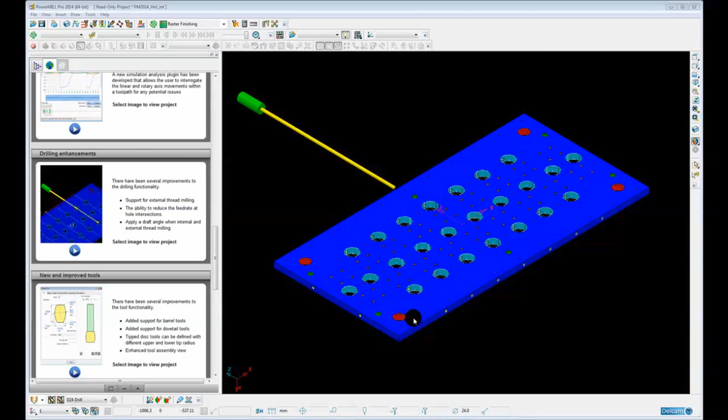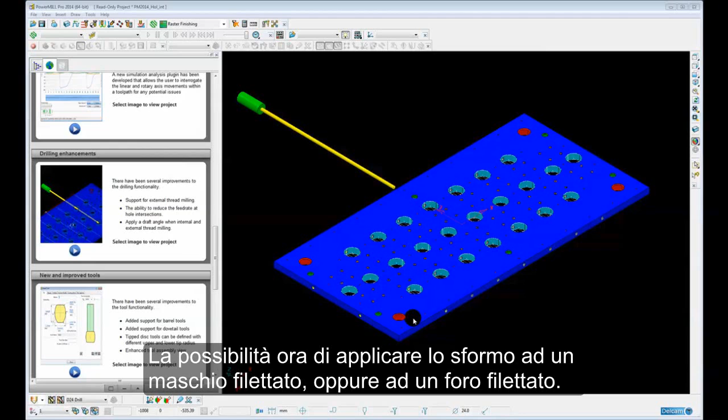There have been several enhancements to the drilling functionality in PowerMill 2014. Included in these enhancements are support for external thread milling using a thread milling tool, the ability now to apply draft to a threaded boss or a threaded hole, and finally the ability to reduce the feed rate when the drill breaks through an intersecting hole. This is particularly useful when gun drilling with small diameter, very long drills.

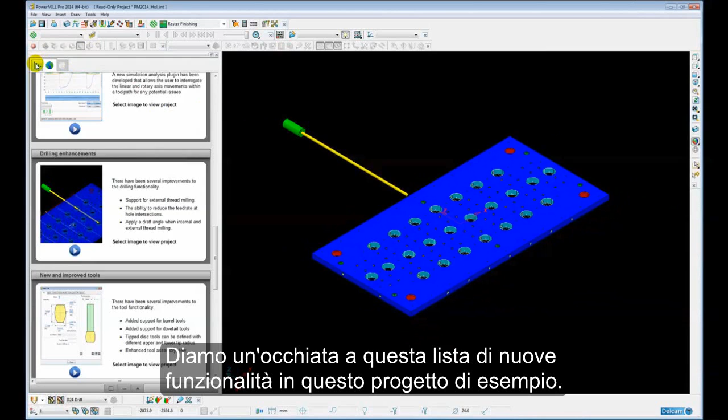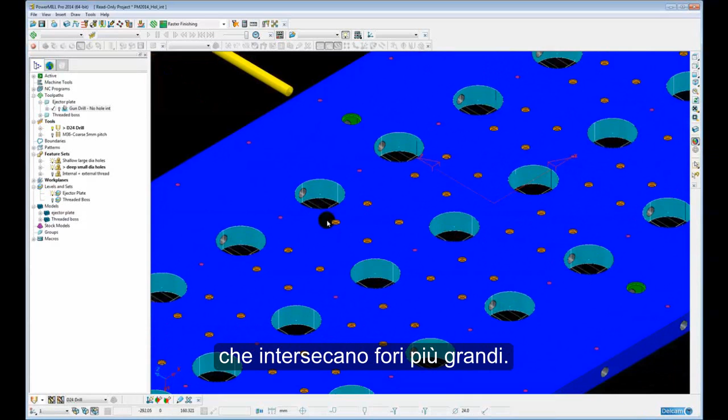Let's have a look at this list of new functionality in this example project. First of all, we're going to look at varying the feed rate at hole intersections. Here we have an example of a mold tool plate, an ejector plate, and we have a series of smaller holes that intersect larger holes. We've already created the hole features by simply recognizing the holes in the model.

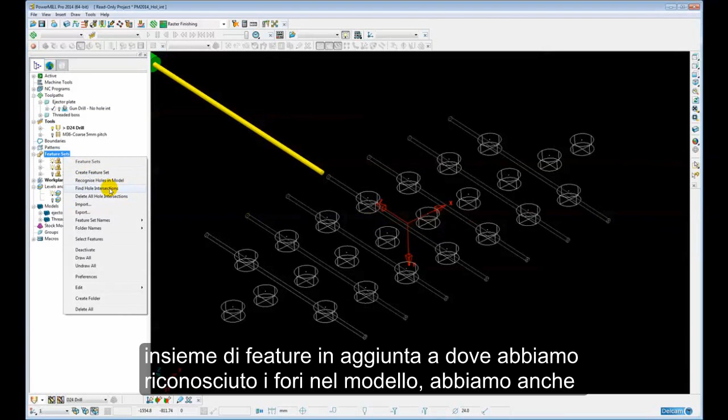Now, before we can apply the varying feed rate at the hole intersections, we need to find all intersections of all holes in PowerMill. This is a simple operation. We simply right click on the feature set. In addition to where we have recognize holes in model, we also have find hole intersections. So this will scan through all the holes and display and identify all the hole intersections. So here we can see the hole features are displayed with the hole intersections.

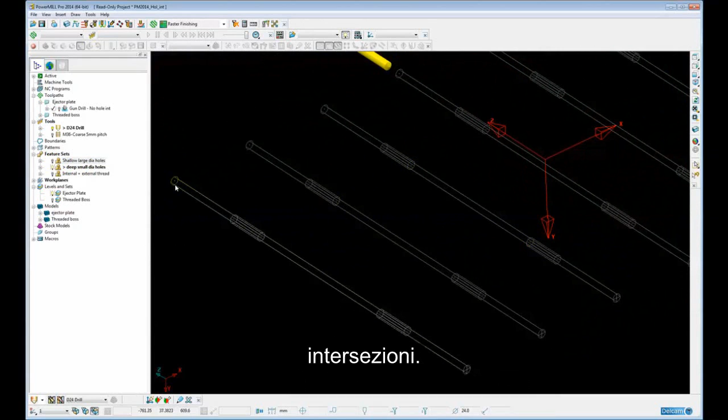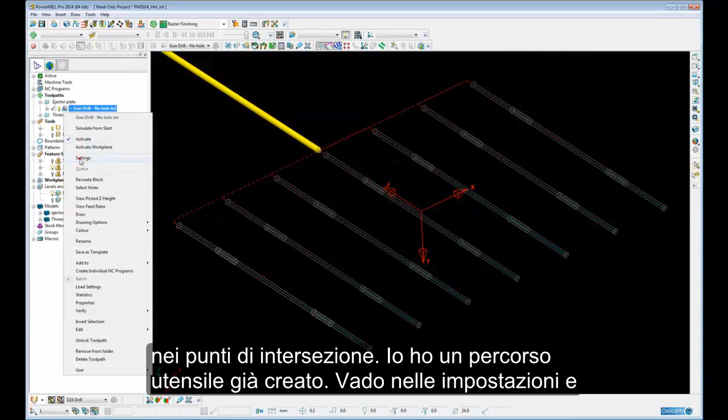Now it's simply a case of creating our drilling toolpath and activating the various feed rates at the intersection points. I have a toolpath already created. If I go to settings, simply clone that toolpath. So just to show you how we vary the hole feed rates, we're going to create a single peck, drill hole to depth.

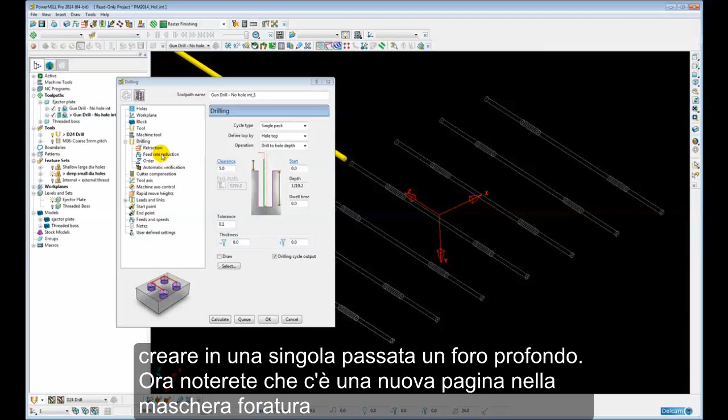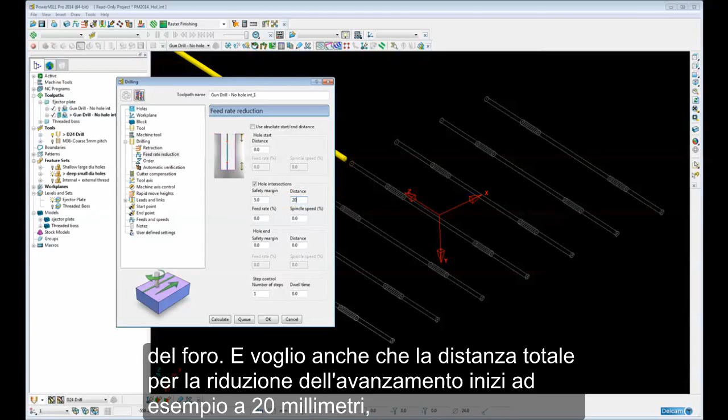You'll notice there's a new page on the drilling form called feed rate reduction. So we're going to reduce the feed rate at hole intersections. Now I want the feed rate to be fully reduced at least 5 millimeters before the actual intersection of the hole, and I want the overall distance for the feed rate reduction to start to be, say, 20 millimeters. So from 20 millimeters to 5 millimeters, that's when the feed rate will be reduced, and I want to do that in 4 steps.

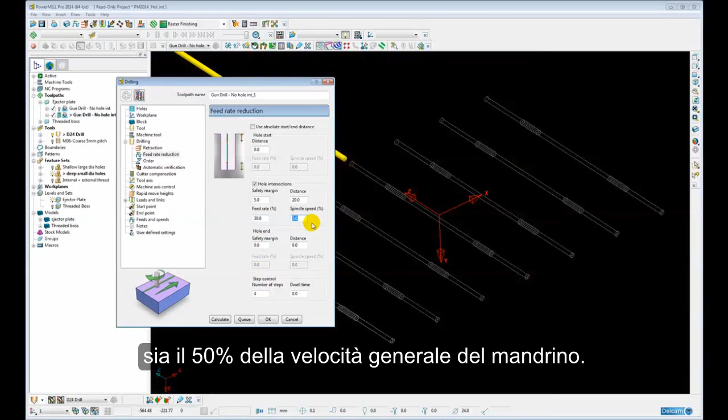And I want the final feed rate to be 30% of the general feed rate, and I want the spindle speed to be 50% of the general spindle speed. So if we go back to our drilling form and select all our holes, and then simply calculate the toolpath.

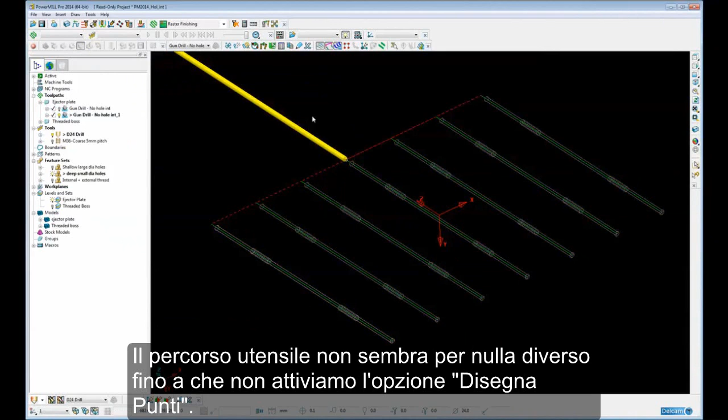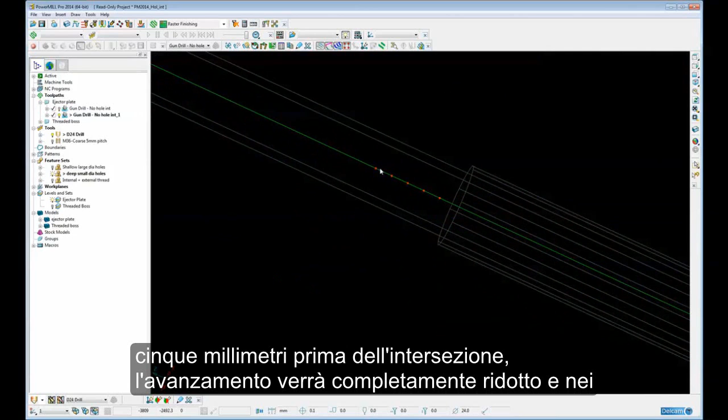So obviously the toolpath doesn't look any different until we switch on the draw points. And then if we zoom in, we can see it's added in extra points within the toolpath. So here we see at 5 millimeters before the intersection, the feed rate will be fully reduced, and an extra 20 millimeters on top of the 5 millimeters is when the feed rate will start to be reduced, and the feed rate has been reduced in 4 increments.

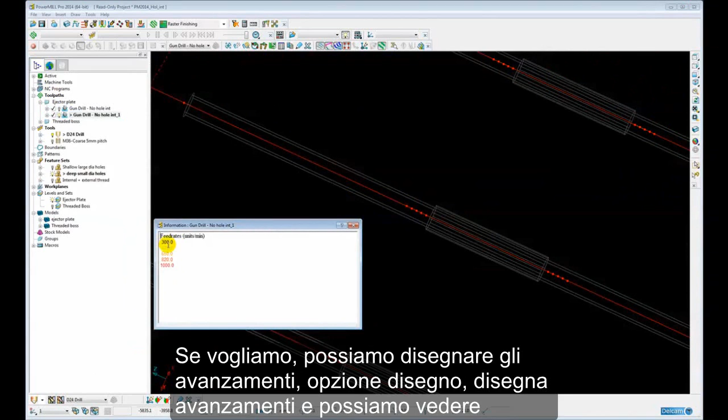If we want to, we can do draw feeds, drawing option, draw feeds, and then we can see the exact feed rates that are going to be used. So our general feed rate is 1000, and we drop down to 30%, which is 300.

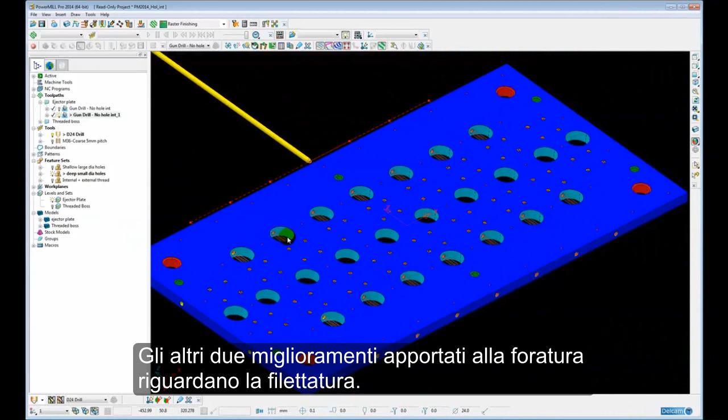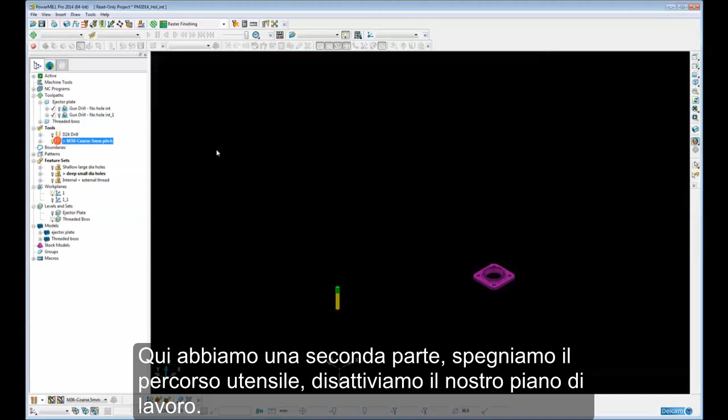The second and third new drilling enhancements involve thread milling. So here we have a second part. Just switch off the toolpath. Deactivate our work plane. So we have a simple plate with a threaded internal hole and an external boss.

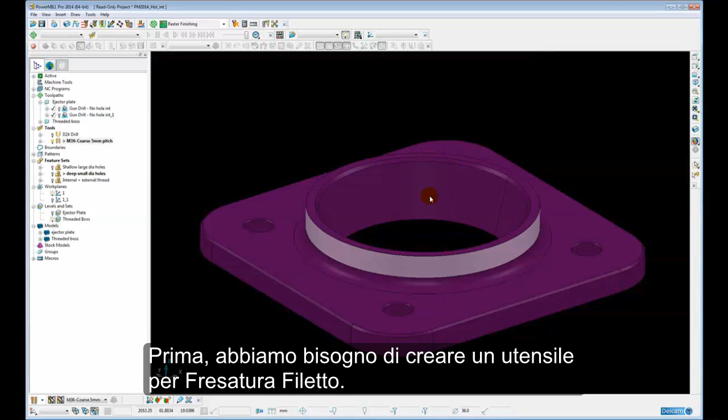We're going to apply a thread milling operation to both of these features. First we need to create a thread milling tool. Now I have a tool already created, so it's a thread milling tool with a diameter 36 with a 4mm pitch. So it's M36 with coarse 4mm pitch.

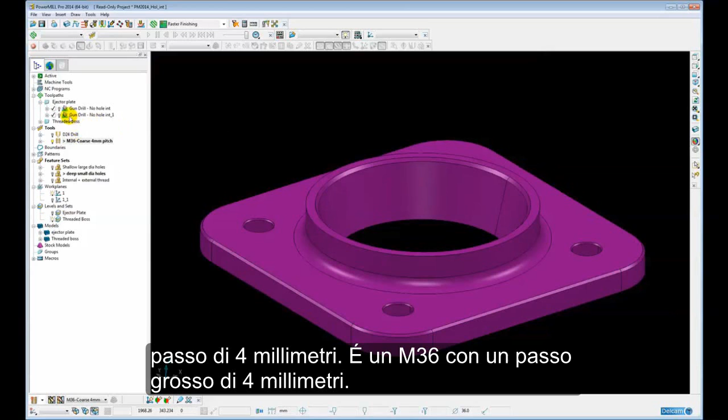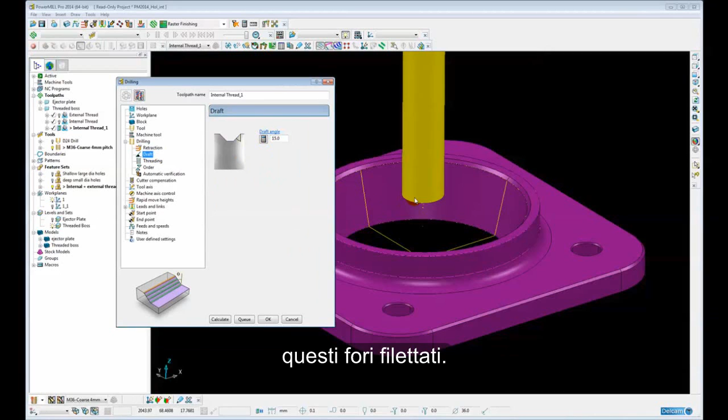I have a toolpath already created to save time. Let's just clone that toolpath. So it's a thread milling operation, and the new feature for 2014 is the ability now to apply draft to these threaded holes. So here we can see it's picked up the draft angle automatically from the hole feature.

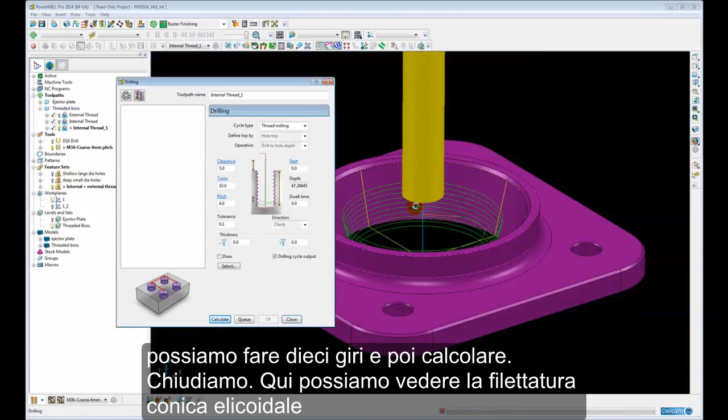We're going to do a number of passes, right hand thread with an angle lead in, 4mm pitch, and we're going to do 10 turns and then calculate. Close. So there we can see the tapered helical thread for the internal hole.

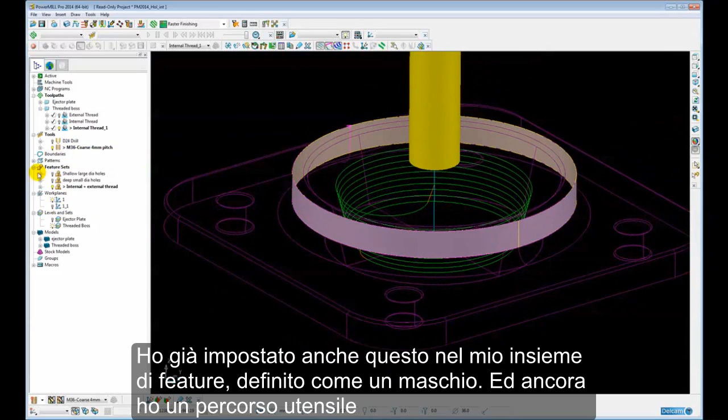To do the thread milling on the external boss, then it needs to be defined as a circular boss, not as a hole, obviously. So I already have that defined in my feature set as a boss. And again, I have a toolpath pre-created with all the parameters saved, so I'm going to clone that.

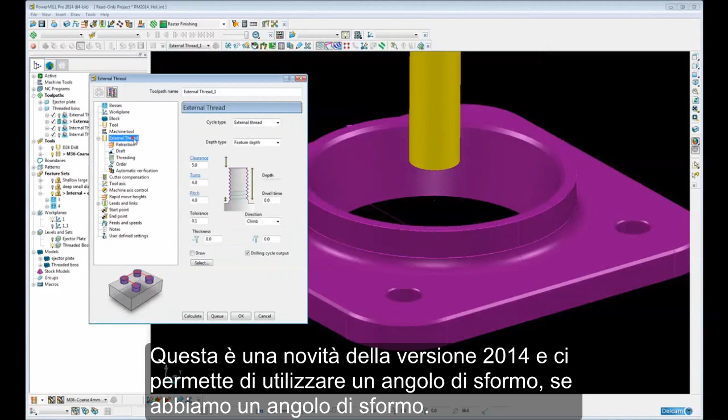Then there's a new type of drilling cycle called external thread. This is new for 2014. And again, it allows us to use a draft angle if we have a draft angle. So number of turns 4, pitch 4, and then calculate. So there we have our external thread milling toolpath.